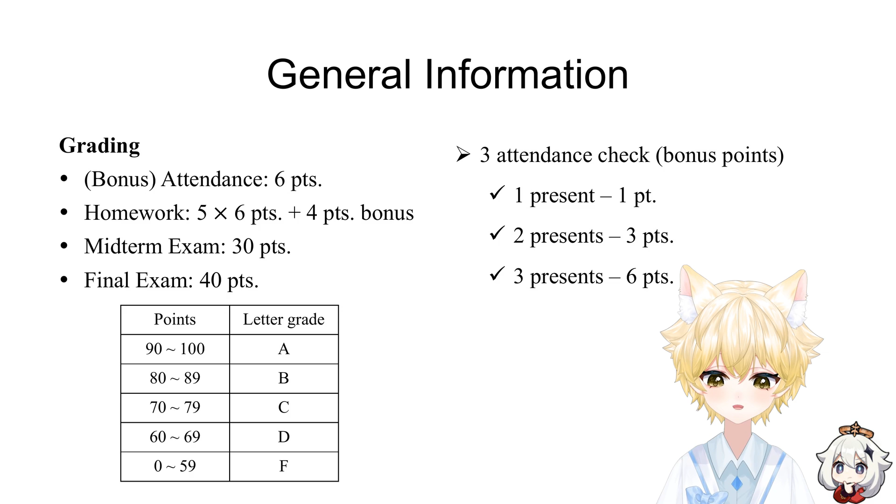I know you are thinking, it's 8 a.m., it's cold, I want to sleep. Trust me, it's early for me too, but think about the math. Imagine that at the end of the semester your final score is sitting at 89 - you are 1 point away from an A. If you missed these attendance points, that 89 stays a B. This is a painful situation to be in, so I strongly suggest you come to class. It's the easiest 6 points you will earn all semester.

Next is homework. We have 6 assignments, each worth 6 points. I will drop your lowest score, so we count the best 5. There is another bonus opportunity here: typed assignments. For each homework, if you type your solution using word equations or LaTeX like Overleaf, I will give you 1 extra bonus point. The maximum you can get here is 4 points total.

Why do I care if you type it? Because you are engineers. It's critical for you to communicate efficiently. If you are handwriting your homework and your formula is messy, or your 2 looks like a Z, people can't understand you. In the real world, if you send a report to a rigorous department or a client, it needs to be professional. So I want to encourage you to practice using tools like LaTeX now. Plus, it makes it much easier for the grader to give you points if they can actually read your equations.

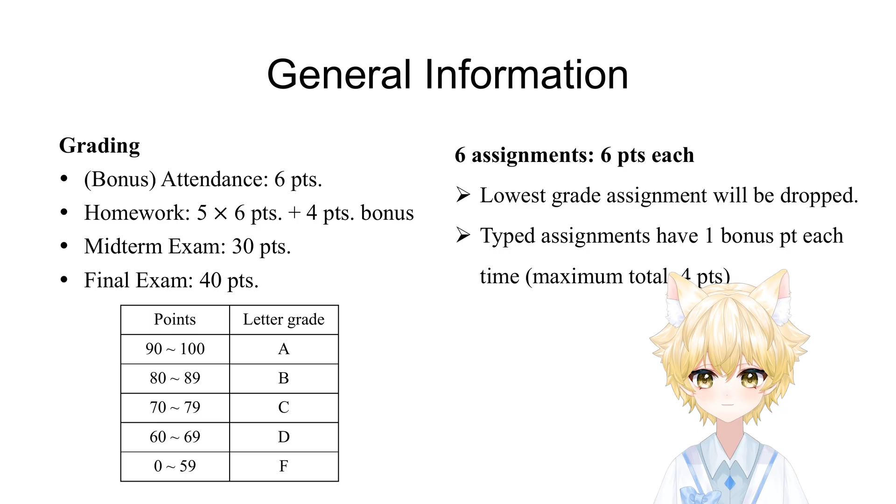We have 1 midterm exam and 1 final exam. These are closed book exams, but you are allowed to bring 1 equation sheet. It can be letter sized, and you can write on both sides. However, I have 1 strict rule for this sheet: you are not allowed to copy homework solutions onto it. The equation sheet is for formulas and concepts, not for simple problems.

Why? Because the homework solution helps you understand the problem. It's not a replacement for your brain. If you just copy the solution, you aren't reviewing. I want you to use the time preparing your equation sheet to actually review the materials. Trust me, if you rely on copying solutions, you will struggle in the exam.

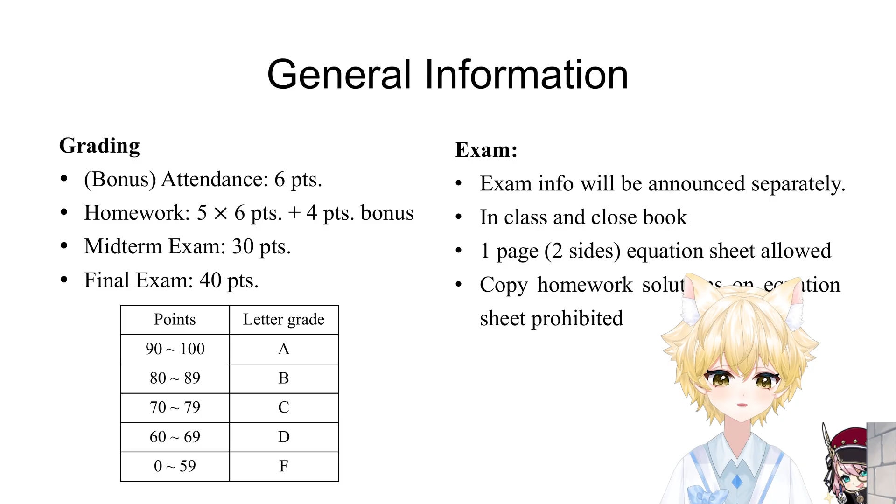Finally, and this is very important, the generative AI. Our policy is a bit different. You are allowed to use AI like ChatGPT, Gemini, etc. in this class. But, and this is a big but, it is limited to clarifying concepts or reviewing materials. You cannot use GPT directly to solve your homework. If you submit work that is generated by AI, that constitutes academic misconduct, and it is strictly prohibited.

Let me tell you a story from last semester. I know there were some students using AI to do their homework. Their homework scores were perfect. They looked like genius. But then comes the exam. The exam is closed book, no internet, no AI. I put a question on the exam that was almost exactly the same as the homework problem, just with different numbers. And those students, they couldn't solve it. Why? Because they had magic tricks during the homework, but they couldn't bring their magic tricks into the exam room.

So please use the homework to learn. Struggle with it a little. That is how you pass the exam.

Lastly, the late policy. Unless you have approval, late homework gets a 30% penalty. And remember, I post the full solutions 2 days after the due date. Once the solutions are posted, I obviously cannot accept any more submissions. That would just be copying, right? So that's the logistics. I know it's a lot of rules, but they are here to make sure everyone is treated fairly. Any questions before we move on?

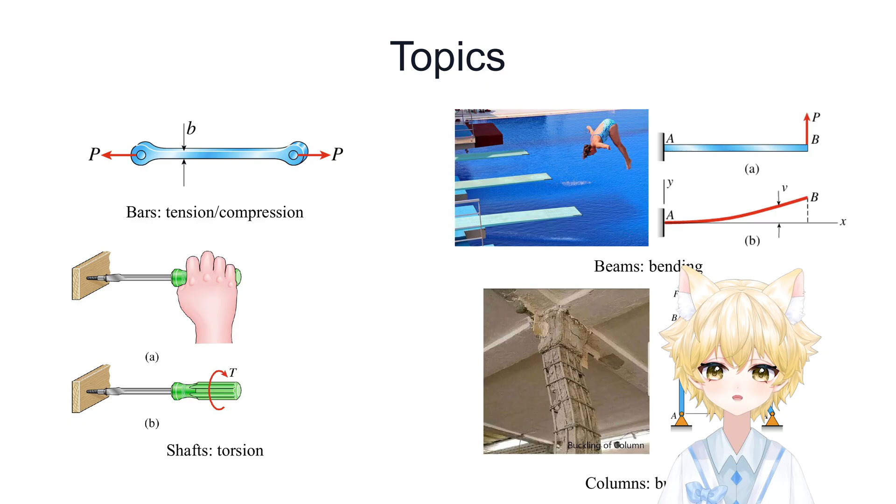Even if the material is strong enough to handle the weight, if the geometry is too slender, too thin, it becomes unstable. Think about it. If you saw a building column that was curved like a banana, would you feel safe? No, right? It looks dangerous, it looks bad. So stability is a critical design factor. We won't just calculate if it breaks, we calculate if it holds its shape.

Here is the logic we will follow. First, we start with the load, which is actually the external force. Then we look at the deformation, because the deformation is the answer from physics, it's how the real world reacts. We determine the internal forces and we relate the stress and strain using the material properties.

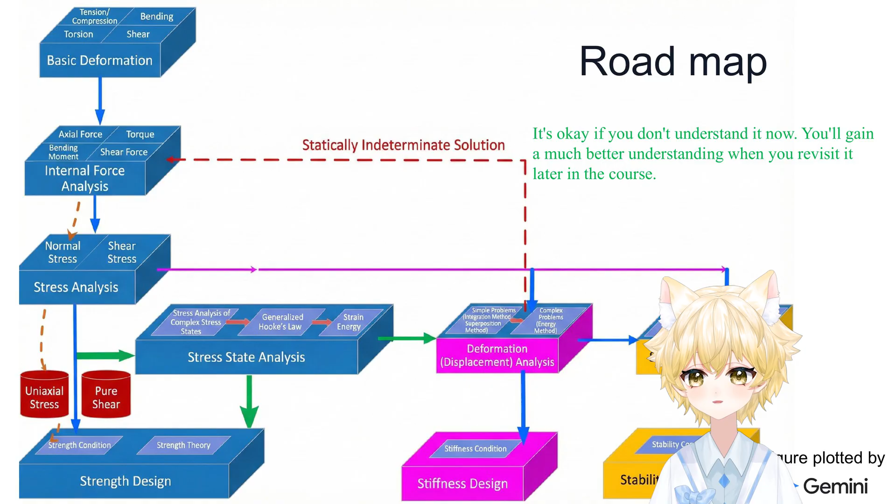I want to ask you a question. If you were to do this experiment in real life, you take a real Toyota Camry and crash it onto a wall, how much do you think that one experiment would cost? Well, someone might say maybe the price of the car. Sure, you destroy the car, but what else? You need the wall, you need the facility, but actually the most expensive part isn't the car, it is the sensor, and specifically the crash test dummy inside the car.

To study a crash, you need a human model inside. This dummy is packed with incredible sensors to measure acceleration and force to see if a human would survive. If the acceleration is too high, the human gets hurt. These dummies are extremely expensive, much more expensive than the car itself.

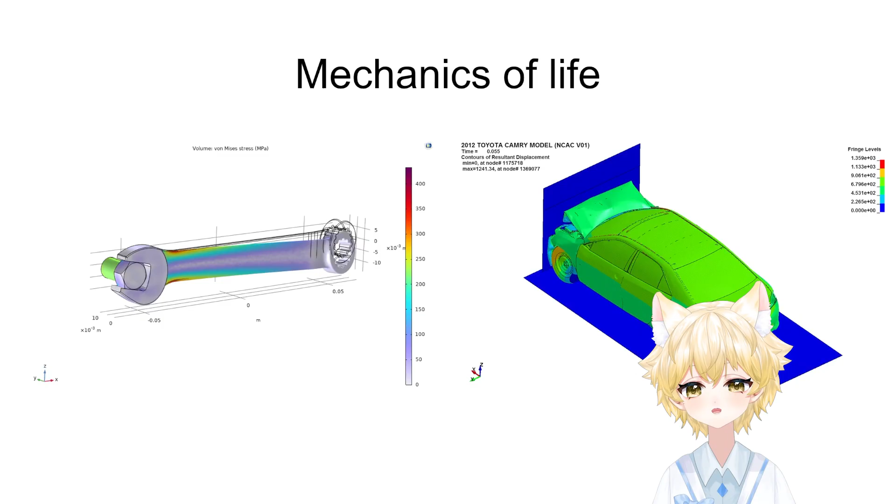So we have talked about the abstract concepts, the strength, the stiffness, the stability, but honestly those are just words on the slide until we see them in action. I like to say that mechanics of materials is the hidden backbone of civilization. Why? Because every time you see a super project, a skyscraper, or a rocket, the only reason it is standing there and not collapsing is because an engineer somewhere calculated the stress and the strain correctly.

Let's look at three specific stories that show how mechanics shapes the world. First, let's look at the sky: the Saturn V rocket. This is a machine that took humanity to the moon in 1969. Now, imagine you are the engineer designing this. What is your biggest problem? It's gravity, right? You need to lift this massive object off the ground.

To do that, you need incredibly powerful engines. When those engines fire, they generate millions of pounds of thrust. Think about the mechanics here. The engines are at the bottom, pushing up. The heavy fuel tanks and the payload are on top, pushing down due to gravity. So what is the state of the rocket's body? It's being squeezed, it's under compression. The whole structure is under immense compressive load along its longitudinal axis, which is a vertical axis.

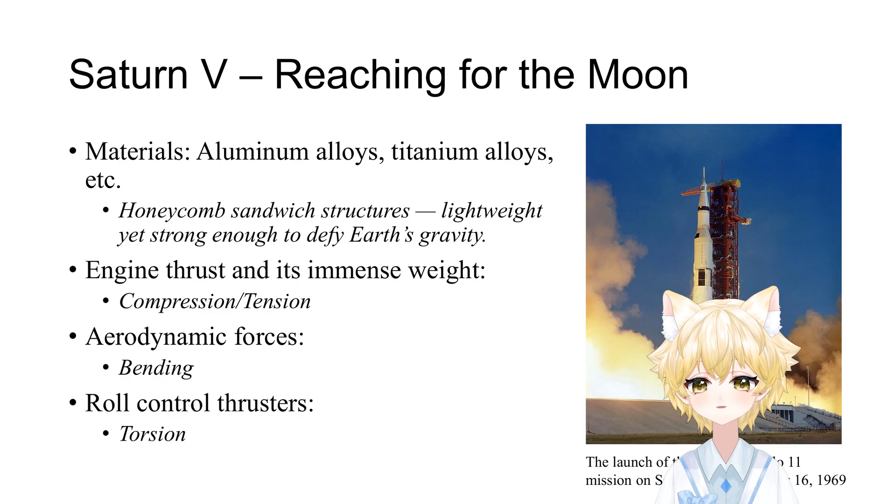The second example is the bathyscaphe Trieste. Now let's go from the stars to the bottom of the ocean. The bathyscaphe Trieste, in 1960, went to the deepest point on Earth, the Mariana Trench. Does anyone know what the water pressure is down there? It is 110 megapascal.

110 megapascals. To give you a sense of scale, the air pressure around us is 0.1 megapascal. So the pressure down there is around 1,100 times greater than what you are feeling right now. It's like having an elephant sitting on your thumb.

Yes, it's about pressure distribution. A sphere is perfectly symmetrical. When the water pushes on it from all sides, the load is distributed evenly as uniform compression. There are no corners. If you have a square box, the corners are stress concentrators, which means they're weak points.

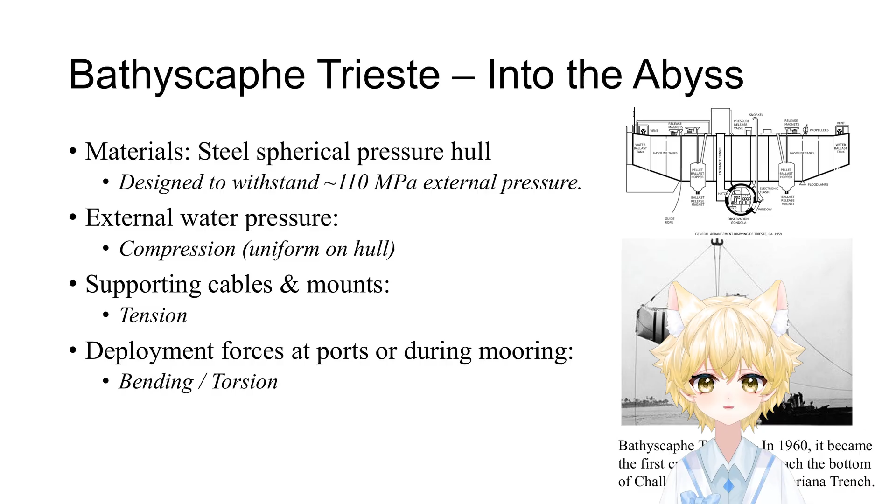We finished the rocket and the Trieste. Let's look at something more familiar: the Statue of Liberty. She looks like a solid statue, but mechanically she is a complex structure. She has two main parts: one is a central pylon, and another is a copper skin outside.

Here is an engineering challenge. New York City has hot summers and freezing winters. When metal gets hot, what does it do? It expands. When it gets cold, it shrinks. The copper skin is very thin, the iron frame is very thick. They expand and contract at different rates.

If you simply nail the copper skin directly to the iron frame tightly, what would happen? As the skin tries to expand in the summer, the frame would hold it back. The skin would wrinkle, or even tear. It would destroy itself. So how did the designer solve this?

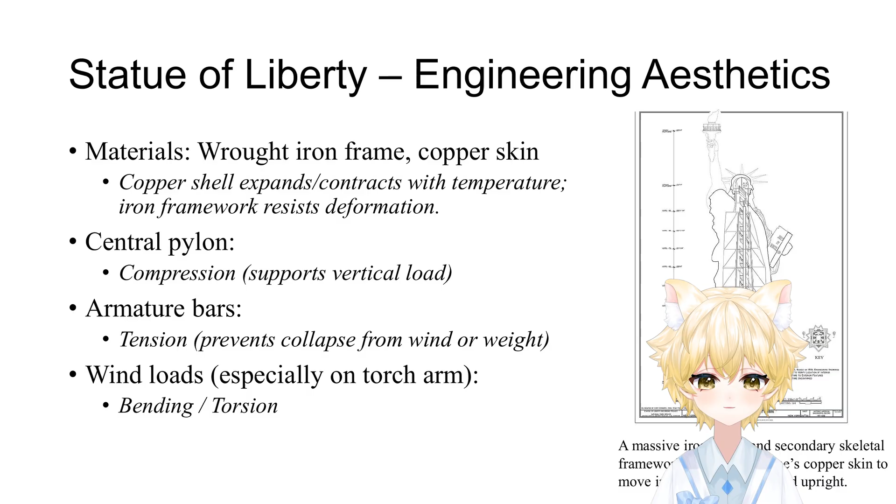Now, those were success stories, but in engineering, we often learn more from our failures. If you mess up the strength calculation, things break. If you mess up the stiffness or stability condition, things collapse. Let's look at two famous disasters that changed how we do engineering.

The first one is the Tacoma Narrows Bridge. It was built in Washington state and opened to traffic on July 1st, 1940. It was a beautiful bridge, the longest suspension bridge of that time. Engineers were very proud of it. They wanted it to look sleek and slender.

But almost immediately, 4 months later, people noticed something was wrong. Even in a light breeze, the bridge would move. Locals nicknamed it 'Galloping Gertie.' Only 4 months later, on November 7, 1940, it collapsed. Let's watch the video.

What is happening here? Is the bridge just bending down under weight? No, look closely, it is twisting. One side goes up, the other side goes down. It is oscillating. Why? The designers made a critical mistake on the aerodynamics and stiffness.

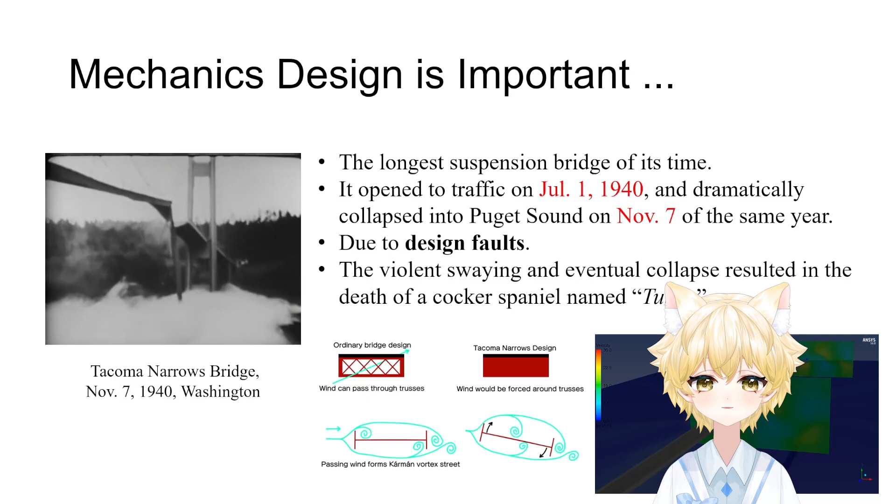Look at the comparison on the slide. The ordinary bridge usually uses open trusses. Wind can blow through them, but the Tacoma Narrows Bridge used a solid plate. It looks like a solid wall. When the wind hits the solid wall, it couldn't pass through. It had to go around.

This creates a very famous phenomenon called vortex shedding. This vortex pushes the bridge up and down periodically. Unfortunately, that kind of oscillation matches the natural frequency of the bridge. This is called resonance. The bridge starts to twist more and more and ultimately collapses. It exceeds the fatigue limit and snaps.

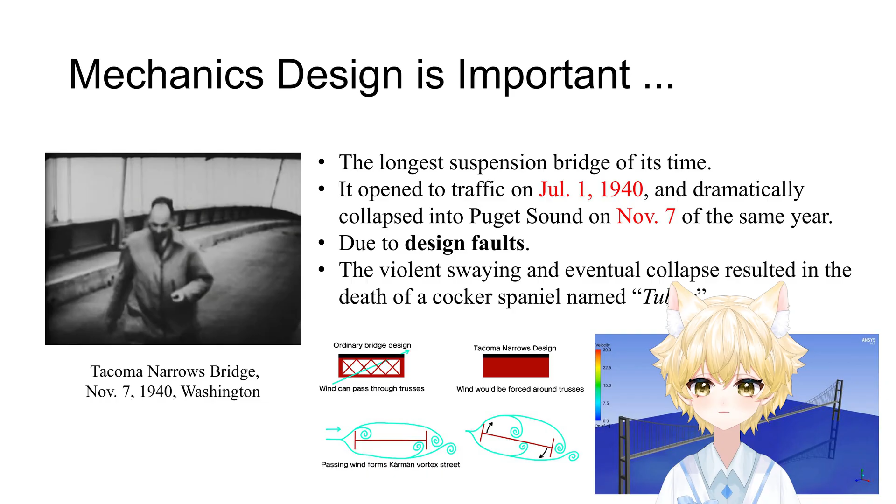Sadly, there was a dog named Tubby who was left in the car on the bridge and died during the collapse. This disaster taught us that stiffness is just as important as strength. The bridge was strong enough to hold cars, but wasn't stiff enough to resist the wind oscillation.

Our final story is terrifying. Imagine you're sitting on an airplane flying at 24,000 feet. Suddenly there's a loud bang, and you look up, and the roof is gone. You are looking at the open sky. This happened on Aloha Airlines Flight 243 in 1988. A huge section of the airplane skin just peeled off.

Immediately the pilots managed to land the plane. The fortunate thing is that all the passengers survived, although they may have gotten injured. But one flight attendant was swept out of the plane and died. That's a sad story. How did this happen?

It's different from the Tacoma Narrows Bridge, which was due to wind oscillation. This is actually something called fatigue. Think about a paper clip. If you bend it once, it's fine. If you bend it back and forth 100 times, what happens? It breaks, right? Even though you aren't pulling hard, the repeated cycle weakens the material.

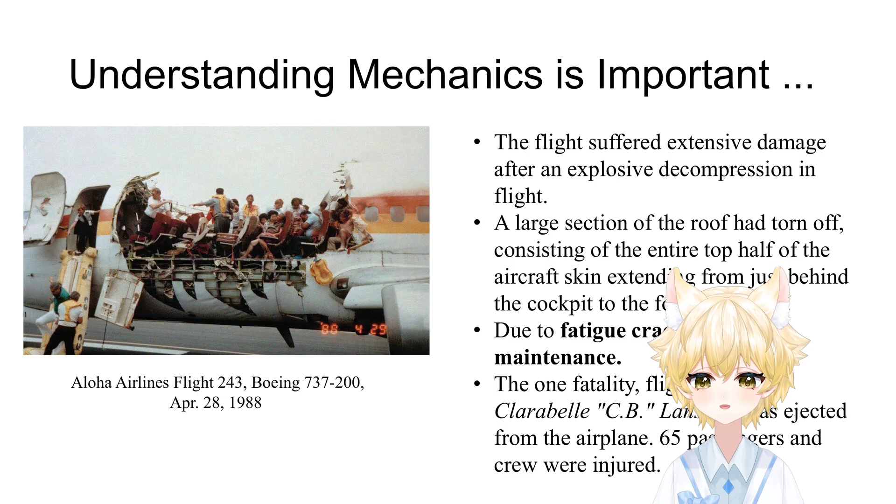Because of poor maintenance, nobody noticed these cracks. Finally, on April 28, 1988, those tiny cracks connected and the skin just unzipped. This is why mechanics of materials matters. We study fatigue so we can predict how long a material will last before it fails from cyclic loading. We study fracture mechanics so we know how big a crack can get before it becomes dangerous.

Although these are more advanced courses, at least in this class you will learn some basic concepts to prepare for those courses. So when you are doing your homework this semester and get frustrated with the calculations, remember, you aren't just solving math problems. You are learning how to keep bridges standing and airplanes safe. You are learning how to protect people.

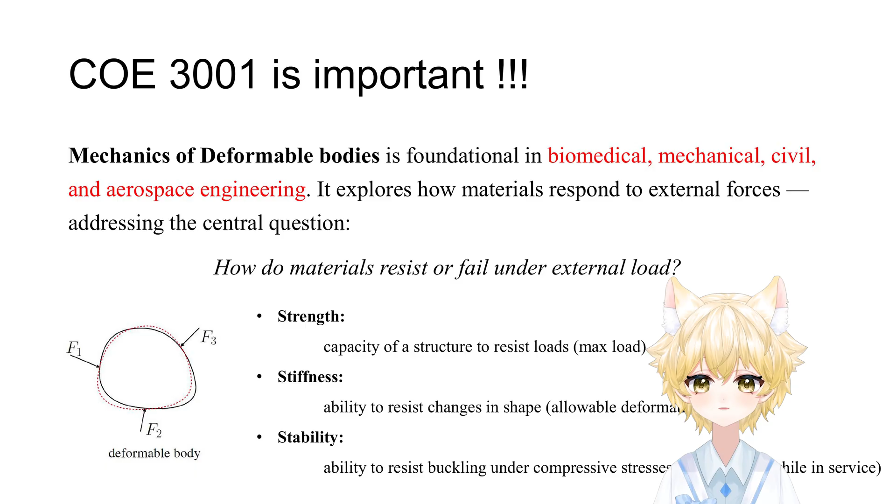Okay, with these stories in mind, let's look at how we actually model these things mathematically. Let's talk about the difference between rigid bodies and deformable bodies. In your previous class, statics, you mostly dealt with rigid bodies. What does rigid mean? It means that no matter how much force you apply, the object never changes shape or size. It's essentially infinitely strong. Of course, that's an idealization.

In the real world, nothing is truly rigid. Here's an example: if I put a tiny ant on a large steel block, the weight of the ant is so small that the steel block effectively acts as a rigid body. But if I put the same steel block into a hydraulic press and squeeze it, it will deform - it will shrink or bulge, or even crack and be damaged. So in statics, you only cared about overall load carrying, equilibrium, and motion dynamics. In this course, mechanics of deformable bodies, we care about the deformation, the change in shape and size due to the load. We are moving from the idealized world to the real world.

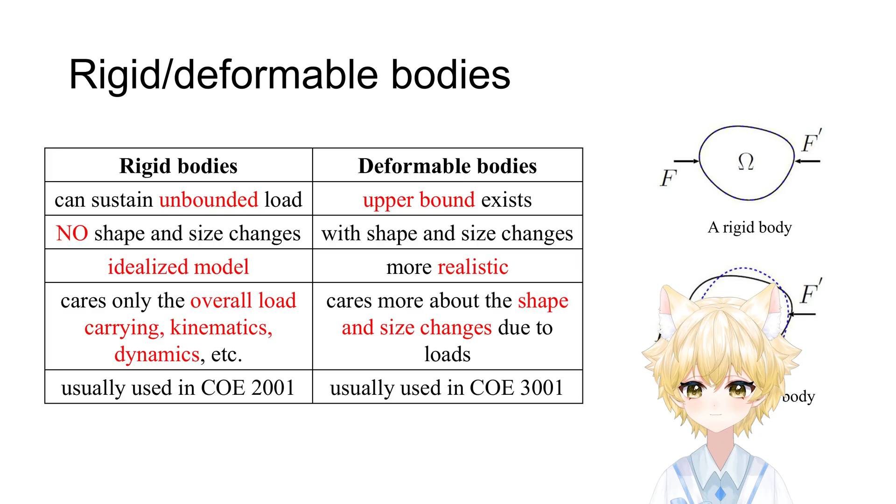Now, analyzing real material is complicated because real materials are messy. They have defects, cracks, and complex microstructures. To make this manageable for engineers, we make 3 key assumptions or idealizations for deformable bodies. Assumption 1: continuous. We assume that material has no voids, no cracks, and no empty space inside - it is a solid, continuous block.

Is this true? Well, if you look at this plastic box, it looks continuous to your eyes. But if you zoom into the atomic level, you see atoms and a lot of empty space between them, which is vacuum. So strictly speaking, matter is not continuous, but for engineering design at the scale of bridges, cars, and buildings, we can ignore those atoms. We assume this solid is continuous.

Assumption 2: homogeneous. This means the material properties are uniform everywhere. Think about a car wheel - is the wheel homogeneous? No, it has a rubber tire and a metal rim. Those are different materials, but if you cut out a small piece of the aluminum rim, that piece is homogeneous. So homogeneity depends on the length scale you are looking at.

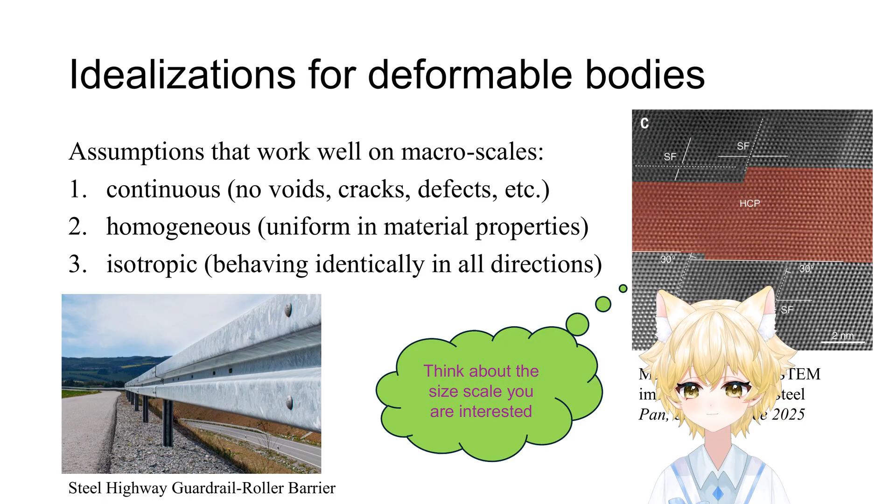Assumption 3: isotropic. This means the material behaves identically in all directions. Metals, glass, and plastics are usually isotropic. It doesn't matter if you pull them up and down or left to right, they resist the loads the same way.

A great counterexample is wood or timber. Wood is anisotropic. Think about a tree trunk, it has fibers running vertically. If you pull it along the fibers, it's very strong. But if you push it from the side, perpendicular to the fibers, it's much weaker and softer, because the properties depend on direction. Wood is not isotropic. But for this class, we will mostly deal with isotropic materials like steel and aluminum.

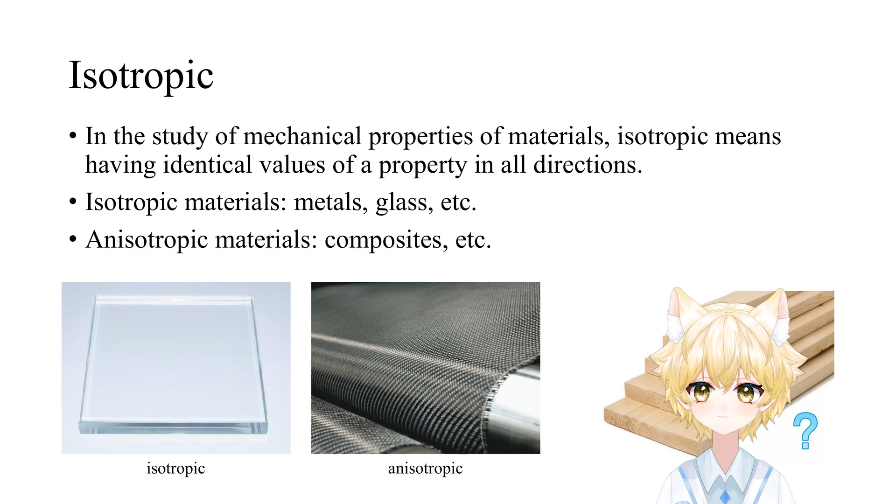Then let's talk about units. This is a math-heavy course, and units are where a lot of mistakes happen. I highly recommend you stick to SI units, the international system: length in meters, force in newtons, stress in pascals, or Newton per square meter.

I know we live in the U.S. and you are used to the U.S. customary system, which typically uses pounds, inches, feet, etc. But in the U.S. system it's a nightmare for calculations. For example, converting miles into feet involves a number I don't exactly remember, but it's very complex. Converting mass to force involves gravity as 32.2 feet per second squared. It's a little messy. In SI units, everything is ten-based, much clearer.

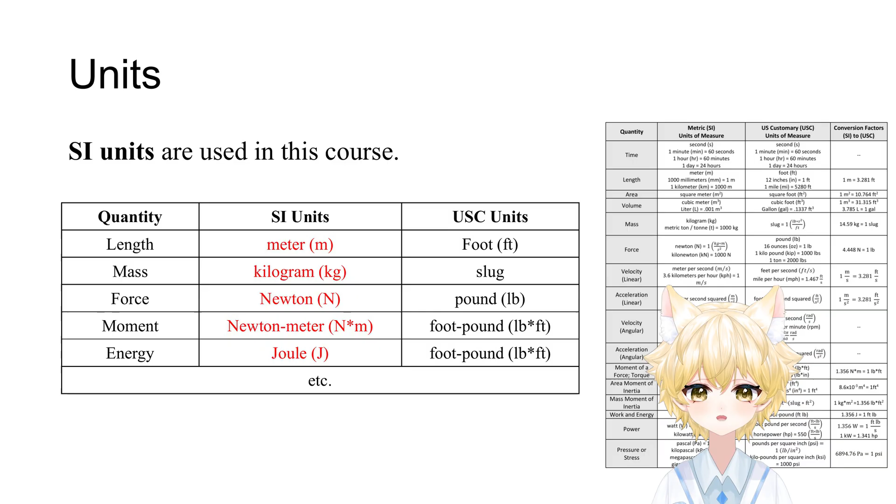If we talk about units, we must talk about prefixes. Be very careful with them. In engineering, numbers are either too huge or too tiny. We don't say 200 billion pascals, we usually say 200 gigapascals. We need to know this by heart: giga means 10 to the power of 9, mega means 10 to the power of 6, kilo means 10 to the power of 3, micro means 10 to the power of negative 6, nano means 10 to the negative 9.

Pay attention here if you are doing calculations involving a square root. You must convert giga to 10 to the power of 9 before you take the square root. For example, the square root of 1 is 1, the square root of 10 is about 3.16. If you mess up the power of 10, your answer won't just be a little off, it would be wrong by an order of magnitude. So always double check your prefixes.

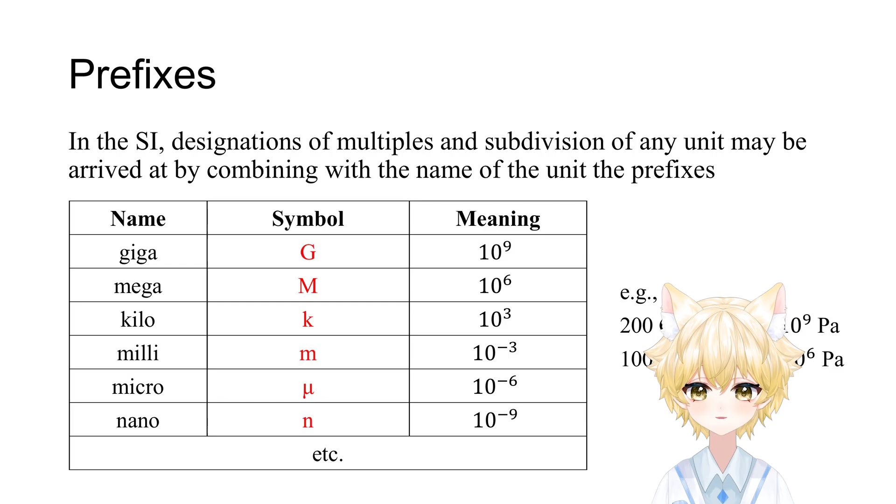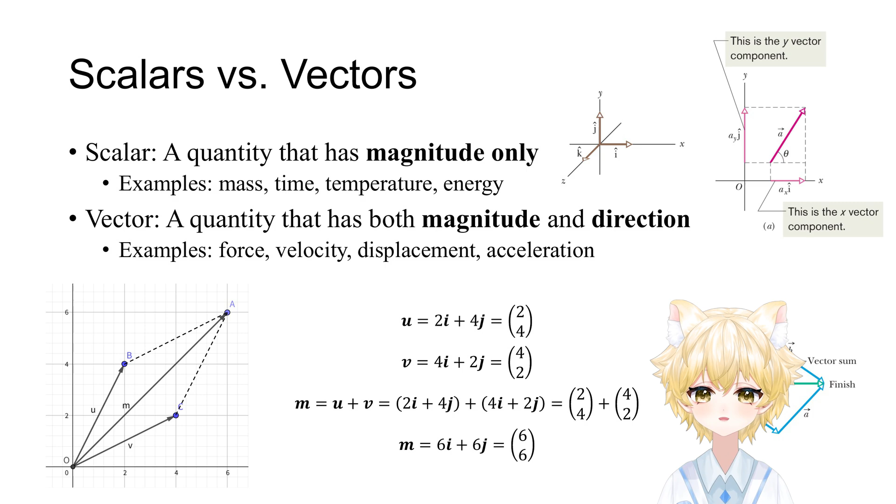Okay, then we go to a quick math review. I know you know this, but it's a refresh. Scalars have magnitude only, and vectors have both magnitude and direction. Since force is a vector, we have two ways to multiply them. The first way is the dot product, which gives you a scalar. It's essentially a projection, how much of vector A is pointing in the direction of vector B.

The second multiplication method is the cross product. This gives you a new vector. We use this for calculating moments and torque. Here's a crucial reminder: direction follows the right-hand rule. Curl your fingers from vector A to vector B, and your thumb points in the direction of the result. We use this a lot when we talk about torsion and bending moments.

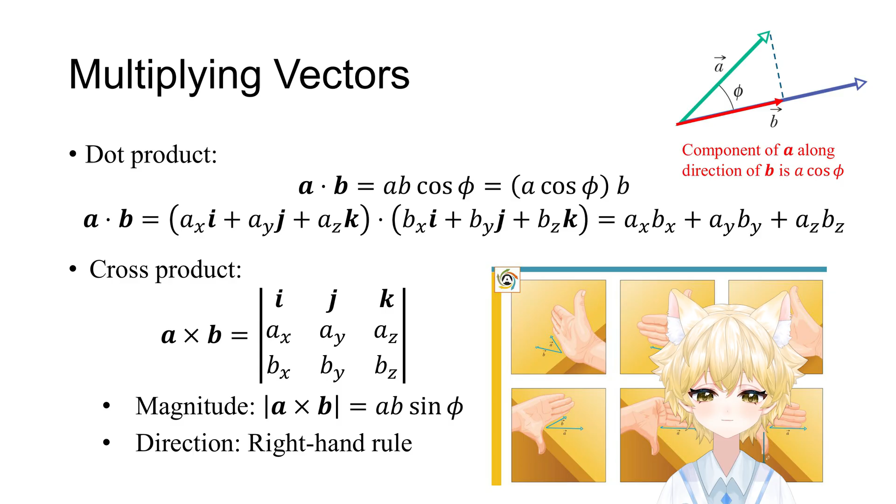Finally, let's talk about calculus. Derivatives represent a rate of change, which is the slope of a curve. In the first part of the course, we don't use calculus much, but when we get to beams, we have to. Why? Because when you bend a beam, the top surface may be in compression while the bottom is in tension. There is a transition of stress across the height. That variation, the change in space, is a derivative.

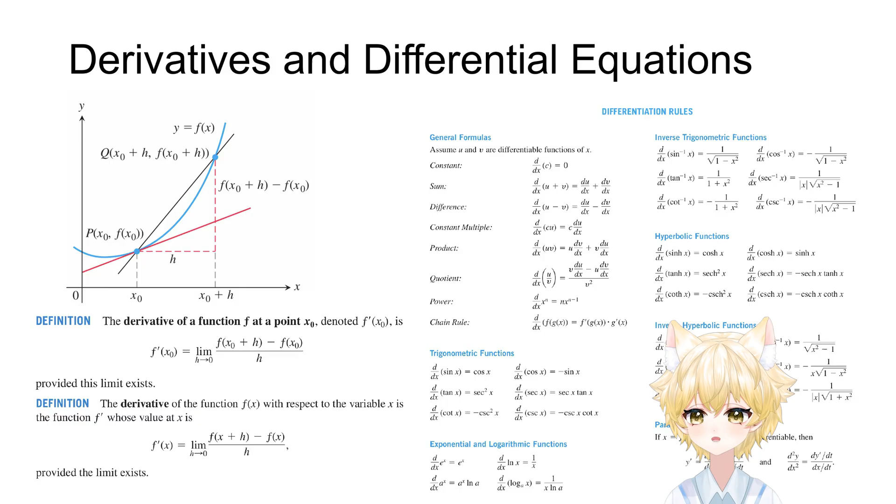This leads us to differential equations. Now, I know they sound scary. You may be thinking of complex proofs from your math class. Relax, in this course we mostly deal with simple first-order differential equations. They usually look like this: dy over dx equals f(x). How do you solve this? We just multiply by dx and integrate both sides, then we get y equals the integration of f(x) over dx. So honestly, if you can do basic integration, you can solve the differential equations in this course. We aren't doing magic here, we're just adding up the small changes to get the total deformation.

Okay, that brings us to the end of lecture 1. We have covered the logistics, the three key concepts: strength, stiffness, and stability, the importance of simulation, and the basic assumptions we will use.